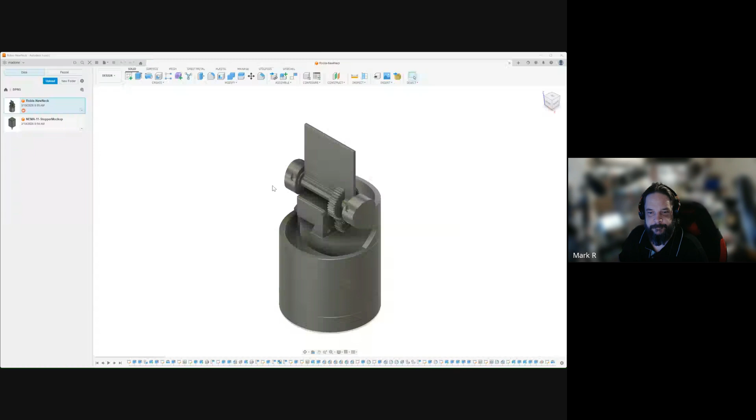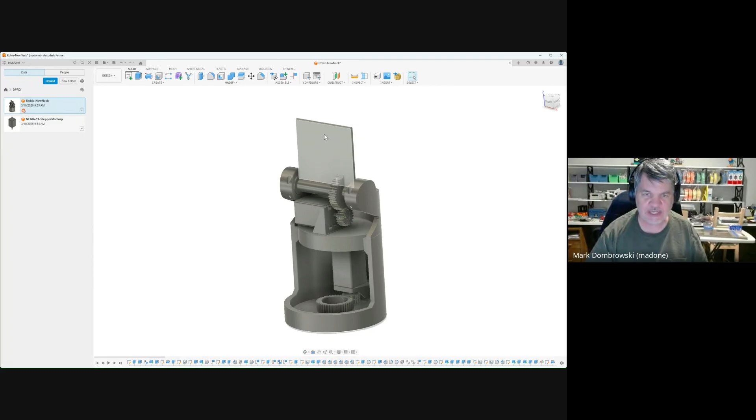So let me take off the cover here. Yeah, so currently his neck is made of a 4-inch PVC pipe, so that's why it's substantial there. Okay. So this is a concept that I came up with. It kind of works with the same type of interference, same type of connection that's currently used in the top of his head, which is the slot up here. And then it basically has 2 stepper motors driving gears to give him rotation, to rotate his head on the neck, and then also tilt on the head, which is basically mimicking what he has already.

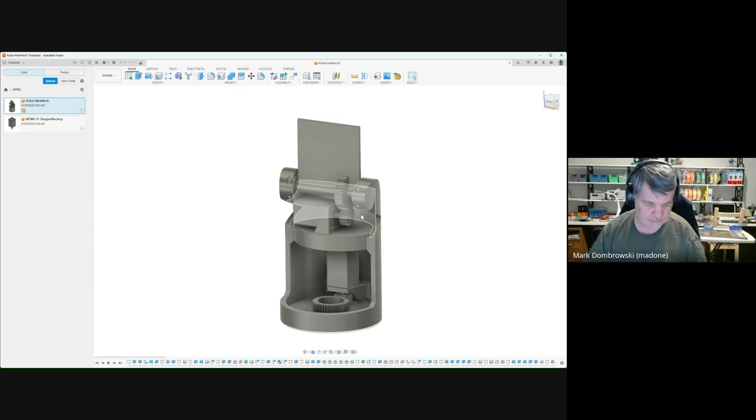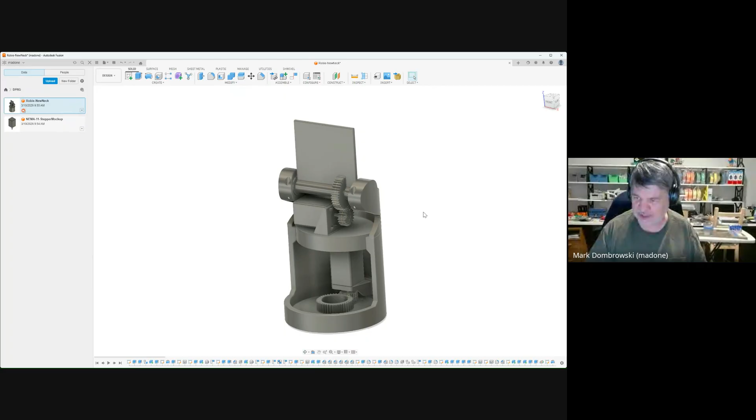Yep. So are you milling PVC pipe, or is that all 3D printed? 3D printed. Okay. Got to prototype it first. So I figured it would be easier to just 3D print rather than trying to mill the pipe. And these days, 3D printing is a little bit more accessible than it was back when Robbie was originally built. So anyhow, this is kind of the design. That's cool. I'm excited. Looks good.

And here's the... Oh, look at that. Of course, you already printed it, minus the steppers. That looks great, Mark. So basically, bearing in the bottom for spinning, driven on the gear here. So the stepper motor will rotate around the gear. And then the top will have the stepper motor for basically controlling the tilt. And so I still need to go into it for the next meeting and make sure that I get the heights right and all of that. Looks about right.

But how big of a stepper is it? I think what, like NEMA 17? 17s should be enough. Actually, to make it fit in this design, I cut them down to NEMA 11s. Oh, okay. I don't think I have any. Do you have any 11s, Mark? What's that? Do you have any 11s? I don't know. I have some 17s. I don't have any 11s. Yeah, that's great, because with a stepper, you have feedback, so you know what position you're at. Right. Hopefully you can join us next time, Mike, when we get together.

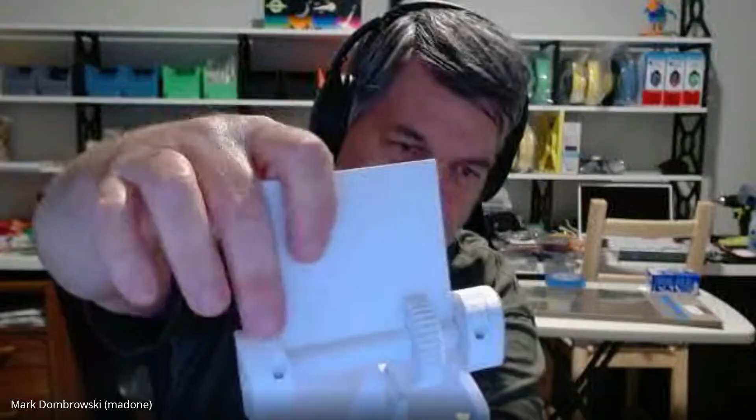I don't know if you can see it too well, but essentially this gear fits a little loose at the moment, but it can be glued in place, or I can make it fit better. But then there's bearing clamps here, so there's 2 bearings on either side of this guy so that he moves freely. Got it. Cool.

You're gonna have to buy the balls wholesale, I guess. You've used a lot of them. You get like 1,000 for a couple bucks. I've been using this same bottle for about 5 years now. Oh, really? That's cool. Are you recycling them though? Sometimes. Usually it's more hassle than it's worth to recycle them. Once you build them up, they're kind of hard to take apart without taking a saw in there to cut the race. Just take a hammer. That's kind of neat.

So that's basically what I had. I didn't know if you had anything else to add, Mark. I have not had a chance to work on it, but I really want to get the wiring schematics that Paul drew up into a CAD software, like KiCad or something, just to make it look cleaner and more readable. I think from there we can translate it easier into what we need.

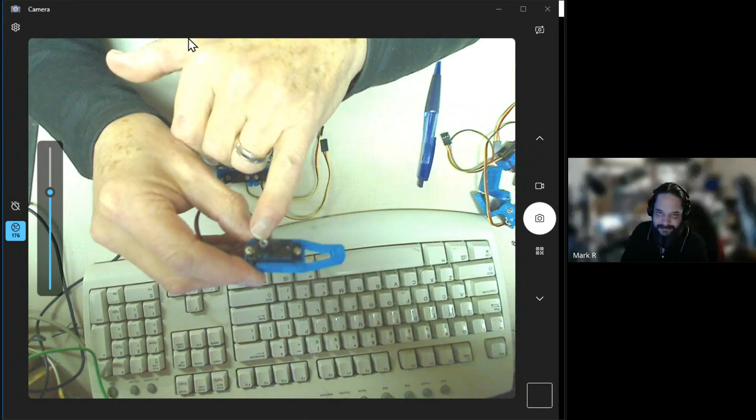Now on to the next interesting little problem. Let me show the servo. The servos come with a 2.5 millimeter bolt, 3 millimeters long. It goes in the hole on the top of the spindle on the servo. And that holds the servo arm on and does a really, really good job.

The problem is the design requires, see where this will go, requires that the bolt that holds the legs onto the servos has to actually go down through the plastic. And then through the servo arm and then into the top of the axle. So the little 3 millimeter jobbies that came with it won't do it.

Again, fortunately, I have a junk drawer full of every little tiny bolt that I've ever seen in my life. I went through them until I found some 8 millimeter by 2.5 millimeter bolts, which are perfect for the job. But they don't tell you anywhere in the instructions that you're going to have to do that. So you may want to plan that one ahead unless you have a plentiful supply of 2.5 millimeter bolts. That won't be any fun otherwise.

I found that issue too. Oh, you found it already, eh? Oh yeah. If you do dig through the GitHub, there's some build notes in there, and one of them does have a link to M2.5 by a random amount on Amazon. So I just bought some. I guess I'm a little naive. I expected the bill of materials to tell me that, and it doesn't. And I never found it in the build instructions for the hardware. Yeah, you're right, because that plastic adds about 4 or 5 millimeters of material, so you've got to have long screws.

But I did like the way the body servos fitted. The little method of attaching those servos was very ingenious. How you put them in sideways and then rotate them once they're in. Yeah, everything has gone together perfectly, apart from the little gotcha with the servo arm. So I'm really, really happy with it.

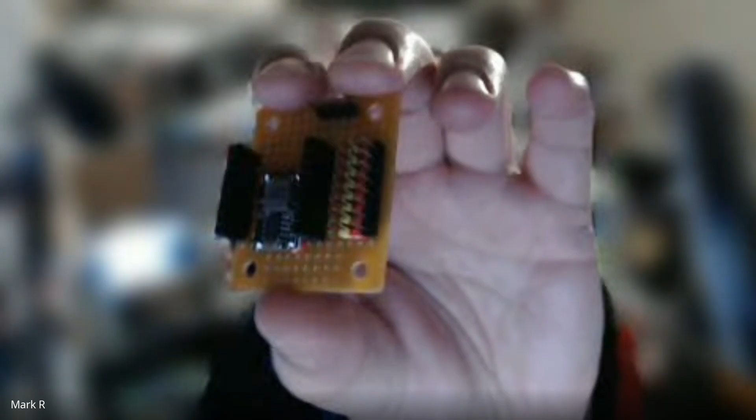So it's a little big, it's too wide for the machine. But yeah, I had a little 5-volt converter in there on the bottom. Okay, so you put one in. Yep. And then the servo, and then this one at the top is for the. That's where this little part was so valuable as a template of how my circuit board was coming together. Yeah, and a brief glance at the ugly underneath, but it works. There's no short circuits in there, so I just got to do some cable management because it's a mess. But hopefully next week I'll have a bot as well.

Anybody else building one? Not yet. No takers? Nah. I don't have enough time to do what I'm doing. That's true. Yeah.

So I'm being cheap. Most of my computers, and I have lots of them, my desktops were not Windows 11 capable. And I figured I better get at least one because I still have Windows apps I want to use. So I went shopping online on Marketplace, found a local guy who is taking stuff that's off lease in companies he works at, checking them out and reselling them. So I picked myself up a small form factor Lenovo for about $80 Canadian with 8 gig of memory in it.

And I promptly brought it up to 32 gig of memory after our discussions here several weeks ago that suggested that even though I'm happy with 16, if I wanted to do anything more sophisticated like virtual machines, I should add more. The computer came with Windows 11 Pro installed and authorized, and it also came with a solid state main drive, a 240 gig drive. And I thought, geez, for $80 Canadian, that's pretty good. Plus the 120 I added in memory since memory's gotten so expensive.

There you go. We're getting there, maybe. Yep, we see it. Okay, yes.

So that's the beast. Is that duct tape there? Pardon? I said, is that duct tape there? Yeah, that's duct tape they put on so the engine will run at this point, but it's not a permanent fix. The problem is that the part where the duct tape is, the rubber has gotten sufficiently hard that it's cracked. So the challenge is to make that whole beast a new one. That's a challenge for somebody that's really good at 3D printing.

Have you considered sealing up the cracks with some 5-minute epoxy? No, we haven't gotten that far yet. Since it's a dealer, they're trying to find a replacement part. My next option is to go to a shade tree mechanic and let him pour some epoxy in there or something like that. What about putting a good paid GPT in thinking mode and having it search forums and fan clubs for alternate sources of parts, aftermarket parts and stuff?

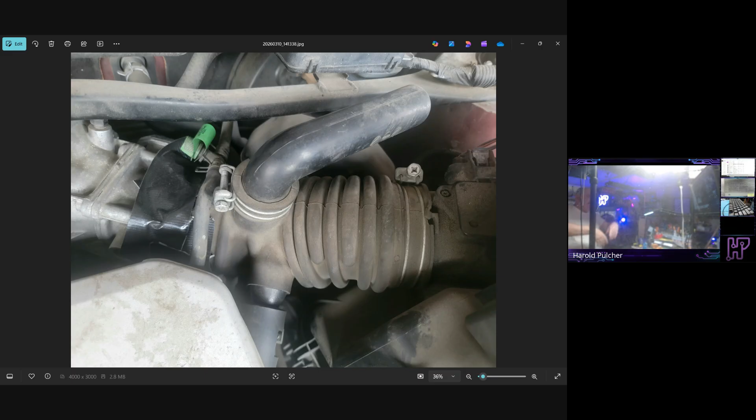But what happened was there was a water distribution manifold that broke. It came out of the thing and went in 4 or 5 different directions. That thing cracked in half, spewed water everywhere. In about 2 minutes it's out of water, so it's not going anywhere. I finally got back in there and fished it out. Went down to Home Depot, grabbed a bunch of copper tubes and fittings and some propane because I didn't have all my tools, copied it up, put it back in there and got it going.

I don't know, 6 months, 8 months later, the mechanic goes, Harold, did you make that copper thing back in there? I said, yeah, I didn't have a choice. He goes, no one does that. It's never going to fail ever again, because instead of the plastic thing now it's a copper tube. Nobody ever gets back there to do that. I don't know how you did it. And I'm like, well, I didn't have a choice. That's how it came down. So I'm getting creative with some of this stuff.

And like somebody just said, if there's a market for those sorts of things, you could charge, I don't know. Okay, it's made out of unobtainium. How much you want to charge for it? That's the deal, right?

Yeah. I was reminded of some ad I saw some years ago. There were ads for this stuff: you get this can of rubber coating, brush it on really thick, and they showed it patching up canoe hulls and flexible things, and it made it seem like it would stick to anything and flex and seal up. I found a link to stuff that looks about right. I put it in the chat, to Lowe's.

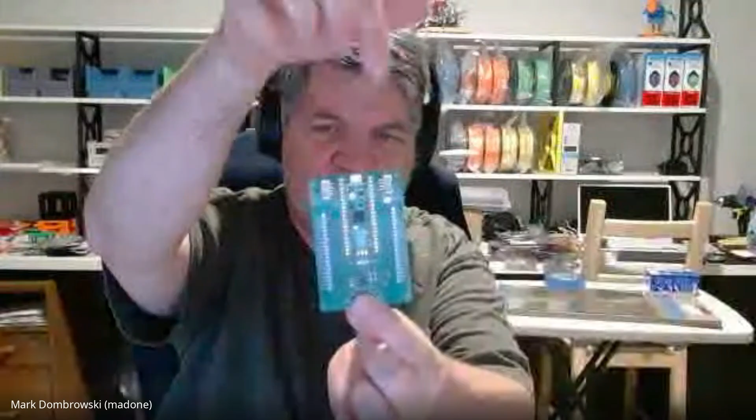So one of the things on this board is it can take power from 3 different sources. Incoming over the daisy chaining connection, there's a 5 volt. Lift it higher. Yeah. Sorry. So into the daisy chaining comes a 5 volt. It can also be connected to the USB, which would deliver the 5 volt. You can also power it via 6 to 24 volt on the bottom, and then it goes through a built-in regulator to cut it down to 5 volt.

So one of the questions I'm having is if I have multiple of those circuits, how do I protect them against backfeeding each other? Schottky diodes. Yeah, that was the way I did. That's the simple way of doing it, which is the way I did on the first board, but you get a voltage drop. So as you daisy chain these together, that voltage drop builds pretty quickly. I'm wondering if there's a way to do it without the voltage drop.

Could you do it with an ideal diode? Yeah, Doug had some designs for the ideal diode that he made a board for. Yeah, that's virtually micro ohms. I believe basically it'll block reverse flow of power. The diode was mainly to make sure you didn't connect it backwards. Okay.

If your grounds are all the same, Mark... Yeah, the grounds are all the same. Then, if you stay within your voltage limits, they should be okay. Like if one board is at 3.35 and the other one is at 3.2, you should be okay, as long as they have common grounds. You don't want to have anything floating. It gets weird when things float. Right. So basically, you're saying each board has a regulator, and you just tie the outputs of the regulator together. Yeah.

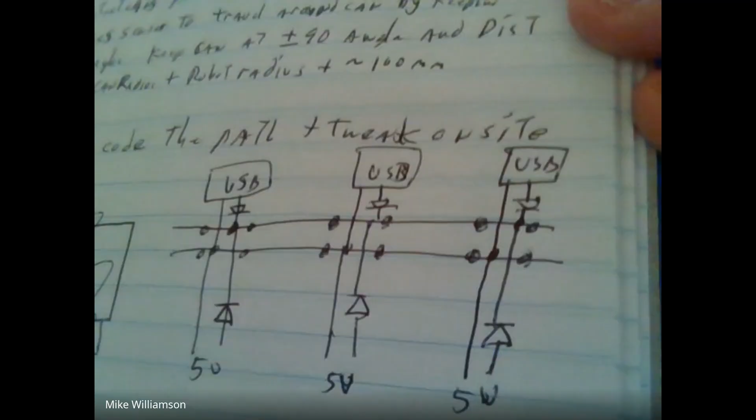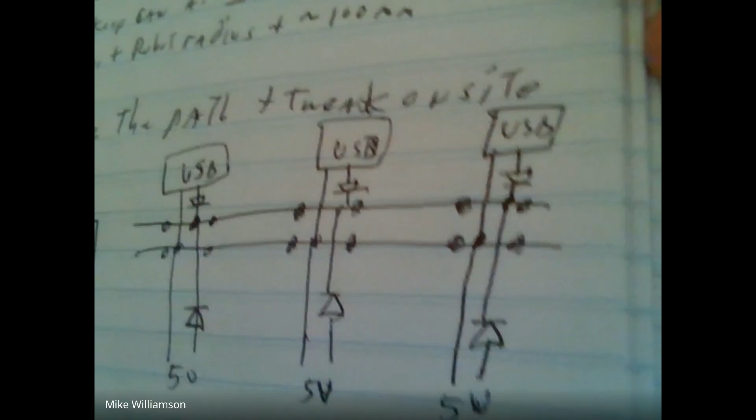5 volts. Yep. So basically the diodes are wire ORed, right? That's the schematic people are talking about here. And so whichever one has the best voltage will supply the bus. Right. You don't really need the diodes on the USB line, I don't think. The diode's built into the USB on the source end, I think. Yeah.

So if you've got a 5 volt supply that's 1 or 2 tenths higher, 5.1, 5.2, it may compensate for the voltage drop, but it'll also prevent current coming from the other ones because they aren't as high, so it doesn't forward bias the diodes. Right. You have to look at the dropout voltage of your regulator too. Almost all new regulators have very low dropout, but if you were using an Arduino, the dropout voltage for the 7805 is like 1.5 volts. That's why you shouldn't put 5 volts in through the regulator, because it doesn't work.

Load. Yeah, I think you're right, Mike. That looks pretty much right. But I mean, that should be okay.